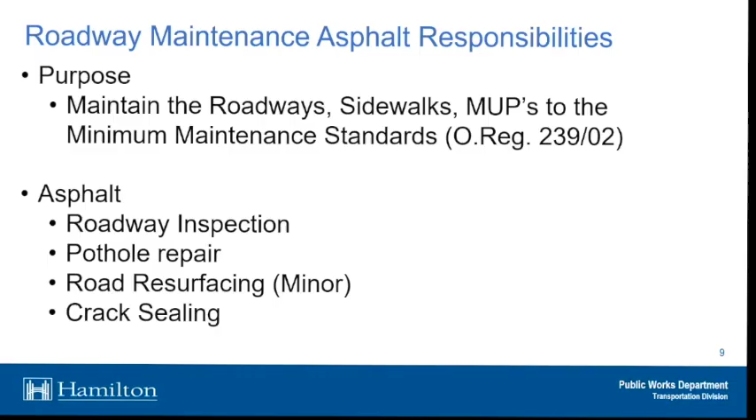Specific to roadway patrol, let's talk about road classification. All roads across the city are broken into a class of highway as defined under O.Reg 239/02. The higher the speed, the higher the volume, the higher the class of the actual roadway. If you can imagine a class 1 roadway - there's none in Ancaster, but the Linc and the Red Hill Valley Parkway would be a class 1 road.

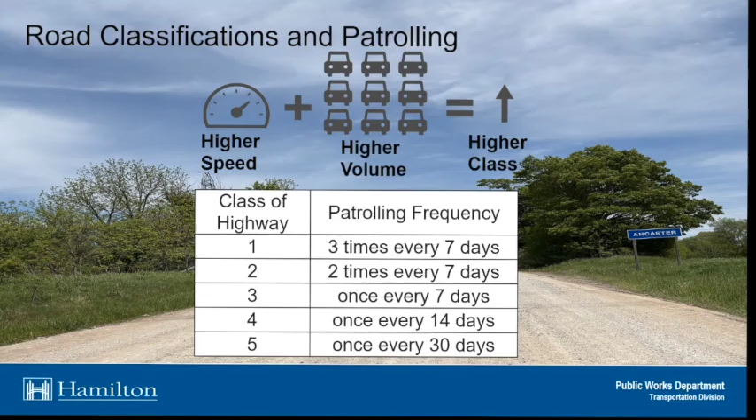So those types of roads we do patrol with our internal staff three times, once a week. A Class 5 roadway, which might be more of a residential road like Amberly for instance, we patrol once every 30 days with our staff.

Now specific to potholes, they're defined under the actual regulations, provincial standards that establish minimum maintenance requirements for roads. The city uses these to prioritize repairs across the entire city. So back to the class of road, under the regulation each pothole across the city has a defined criteria for the area and the depth. So if you find a pothole on the Linc for instance, we would have 4 days to repair it once we become made aware of that deficiency.

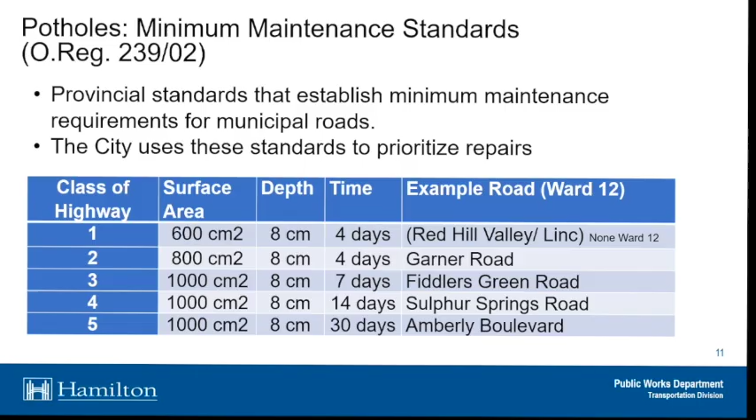A lot of the times we are proactive with our group out there patrolling the roads, and we will pin these deficiencies before they ever get called into the city, and we'll repair them within 4 days. Likewise, for a Class 5 roadway, we would technically have up to 30 days to repair them. However, anything defined at this size or greater, typically we're there the same day or the next day at the latest, usually.

Just a little graphic here about how potholes are actually formed, it'll tie into the next few slides. So water actually seeps through small cracks in the roadway. Once it gets under there, typically only over the winter months, it'll freeze. When it freezes it expands, then it'll melt. That cyclical process happens over and over, and eventually a void is left under the actual pavement. After that, traffic will go over top of that, and again that cyclical process will create a pothole.

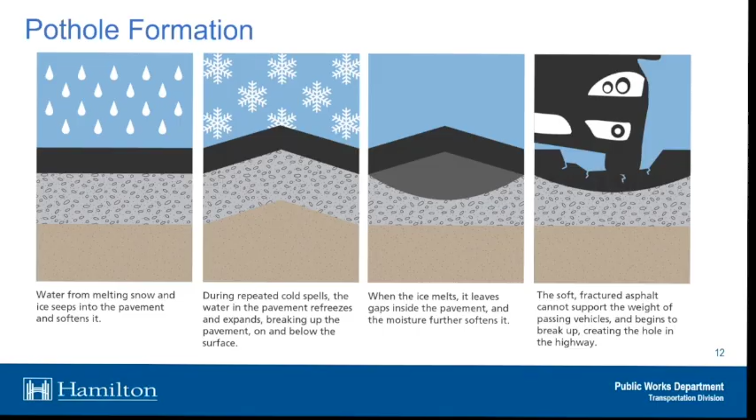So how do we find potholes, and how is our pothole repair completed across the city? Like I mentioned, we do have road patrol, we've got 6 staff that are driving across the city consistently throughout the entire year, and they'll identify any potholes we do find and flag them, and we'll go out and repair them. Additionally, we do have staff in other departments, our group, that do find them, again pin them, flag them, and we'll go out and repair. As well as councillor's office, maybe if anybody's called the councillor's office and submitted them, we do hear from the councillor's office, and we do prioritize and repair those as required.

And one of the biggest things we do rely on is the customer call center, or Ask The City. I've got a link to that at the end, where residents do call in and report it. We do create a service request for all of those, put it in the queue, and prioritize repairs and try to get them done as fast as we can. And then we've got 2 types of repairs we do complete across the city.

We've got temporary and permanent. Temporary is more aligned with anything around the winter time, when we got to fill a hole quickly before the next storm comes around, and it'll look more like the image on the right there. And then we've got a little bit more of a permanent repair, which is typically done outside the winter months. That's where we'll actually saw cut the asphalt, put a full depth repair back in place, tamp it, and move on to the next one. A good example of that would have been Russo Road, we just did 2 of those patches there leading onto the Linc.

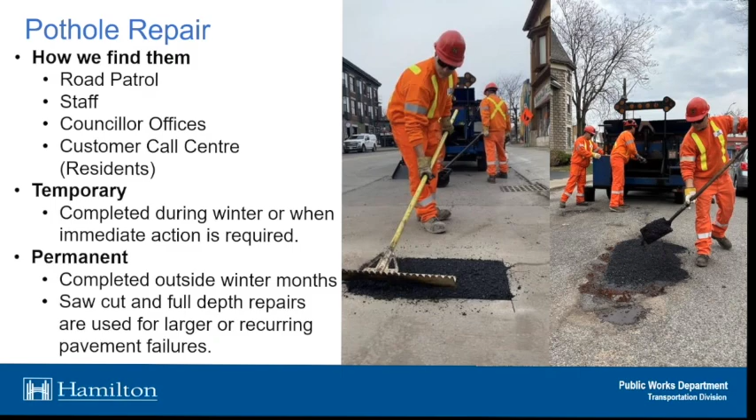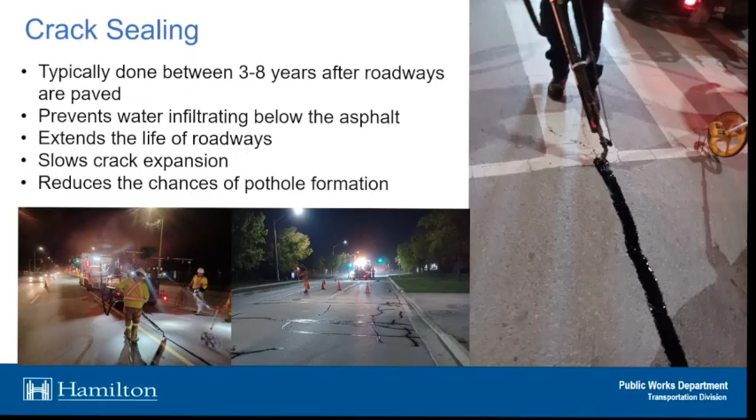Crack sealing, tying back to that image I just showed. This is a process we typically do in October of every year. It's typically done on roadways about 3 to 8 years old, depending on whether it's a full depth replacement or just a mill and pave. The purpose is sealing the road so water can't enter, which extends the life of the roadway, prevents potholes from forming, and slows crack expansion.

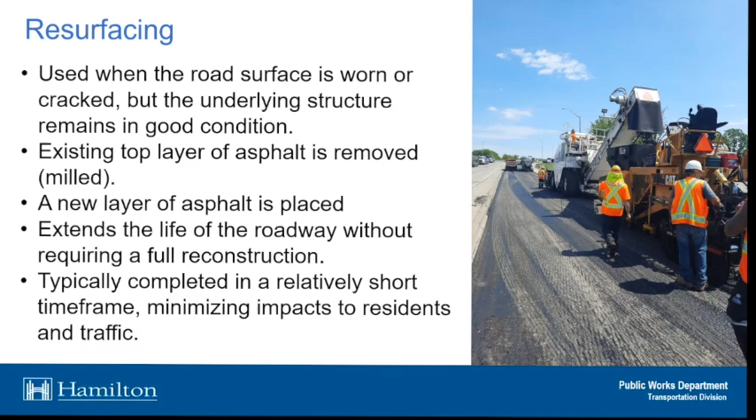Resurfacing is the one we wish we could do a lot more of. This is just mill and pave, and this is us on the Linc. Our group does that every single year, where we shut down the Linc and pave it over the weekend. So when a roadway surface is worn or cracked, in conjunction with engineering services we have a list of roads where we remove the top layer of asphalt and put a new layer on top, addressing potholes, deficiencies, or cracks across the city. It really does extend the life of the road with minimal impacts to most residents.

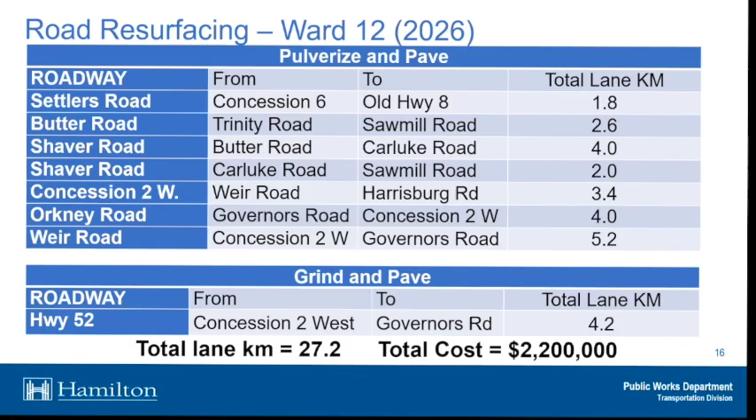Specific to Ward 12, our group is doing these roads for resurfacing this year. We're putting just over $2 million into Ward 12, doing approximately 27 kilometers of roadway across the city. I'll leave this up for a bit. This is basically the last slide, but it's the mill and pave process we're doing this year in roadway maintenance. I can always come back to that later, but again, this is roadway maintenance.

If you do see a pothole or a deficiency, Ask City or pothole at hamilton.ca are fantastic resources. We do truly appreciate anybody that calls those in. We prioritize and we take care of them and address those potholes. Happy to answer any questions after, but I'll throw it to my colleague Dipankar in engineering.

Good evening, everybody. My name is Dipankar Sharma. I am the Acting Director for Engineering Services. We're going to take you through how we think about roads, how we inspect roads, how we plan roads, and how much we invest in roads. With me is my colleague, Greg Boozman, who is the Senior Project Manager with roads.

Here's the plan for tonight. First, we'll give you an overview of the road network and show you a ward map for Ward 12, talking about all the roads there — you'll probably see your road on the map. Second is road maintenance. Peter Sinolis touched on that in depth. We're going to look at when we inspect roads, how we decide between maintenance work versus capital work, which is more about reconstruction and spending a larger dollar value. Third is where the money is spent and how. How much money does the city actually spend on roads, and what is our backlog? We'll have a discussion around that.

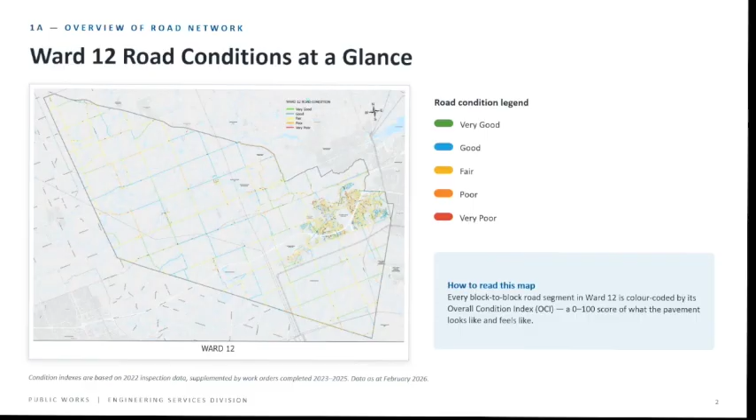Jumping on to our next slide, this is a zoomed in version of it. We're looking right now at the Ancaster urban core. We're going to leave this slide for a second. If you find your street, please go ahead.

Notice that there's a lot more yellow and orange here than the rural map that we had. That means the condition is between fair and poor, and there's a bit of red here too.

One of the things to know in Ancaster specifically, which is very local to this area, is when Ancaster was being built, the way subdivisions were planned, a lot of subdivisions were built together. They were built in waves and built together.

So when they age, they also age together. Once the subdivisions are aging, the roads are aging too, so you will have pockets of subdivisions and pockets of roads that need to be coordinated, and that helps us put all the work together. There's some good news here where we can recognize patterns and put all the roads in one neighborhood together having similar type of work.

We're going to talk about what different types of applications we do later in the slides. What that means is it helps us in getting better prices. So you have one contractor looking at a bigger section of the road, and hence the mobilization cost is lower, and we get better price per street.

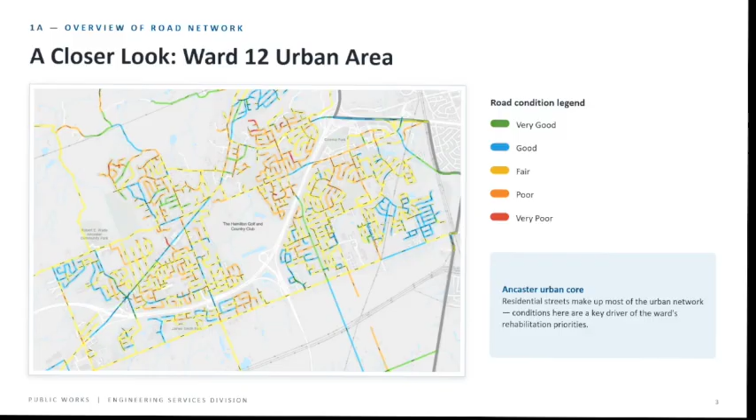So if you see your street and it's in orange, I know it's super frustrating. You see all the potholes that you travel through. Hold that thought in your head. When we go through the rest of the presentation, we're going to take you through this journey and show you why these roads are orange and why they're red, and how we're going to plan to improve them.

So before we get into the minutiae of things, let's talk about the scale of Hamilton roads. We measure roads per lane kilometers. So what that means is 1 kilometer of lane for a 2-lane road means 2 lane kilometers, right?

So if you have a kilometer of 4 lanes, that means we're going to talk about 4 lane kilometers, right? So we're all on the same page. City of Hamilton currently has 6,500 lane kilometers. To put that in perspective, it's a fair way to measure: if you were to travel in a single lane kilometer from here to Vancouver and back, and then go back to Vancouver and halfway back to your home, that's how many lane kilometers of roadway we have in Hamilton.

The reason is Hamilton is an older city and it has a lot of new parts coming up. So Ward 12 shares near about 984 kilometers of this network. It's about 15% of the entire city. Now, what really shapes Ward 12 is 61% of Ward 12 is rural.

What that means is when you talk about rural roads, there's fewer cars, often heavier traffic. You will see a lot more trucks, a lot more farm equipment. You will also see heavy traffic sometimes. There's not a lot of curbs on these roads, and there's no storm sewer. So these roads are slightly easier to maintain, slightly easier to work on.

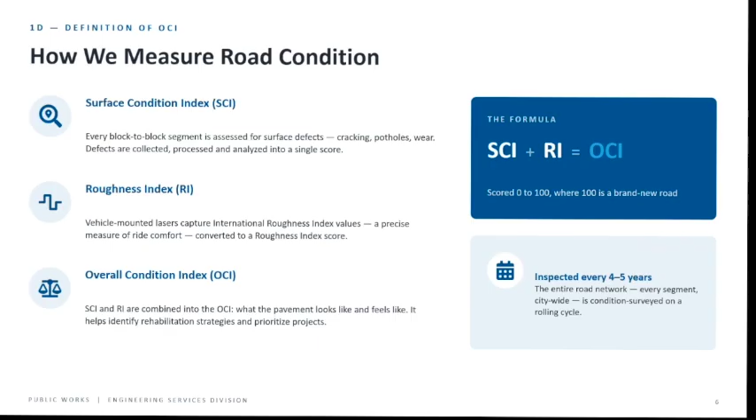So this is where we look at how these scores measure against the map. If you go to the City of Hamilton's website, there's a map that shows what color the roads are in. So starting from the top, any road which was recently done will have a very good OCI, which is 86 to 100. And what that means is that we're not leaving that road to decline - we're going to do some preventative maintenance on it.

So Peter talked about crack sealing and pothole repairs. If you see any cracks, it's very similar to what we do on our driveways - if we have asphalt driveways, or if we have concrete, we go seal it. So that would be part one. The second is when a road is in that condition of 71 to 85, which is preventative maintenance - again, a very similar strategy that we apply. The cracks do get bigger, so we're still looking at crack sealing.

Then we get into a road that has slightly poor condition, which is from 56 OCI to 70. So going back to the definition of OCI, overall condition index, this is where you will see an overlay done, a shave and pave, or in more practical terms, what we call operational resurfacing.

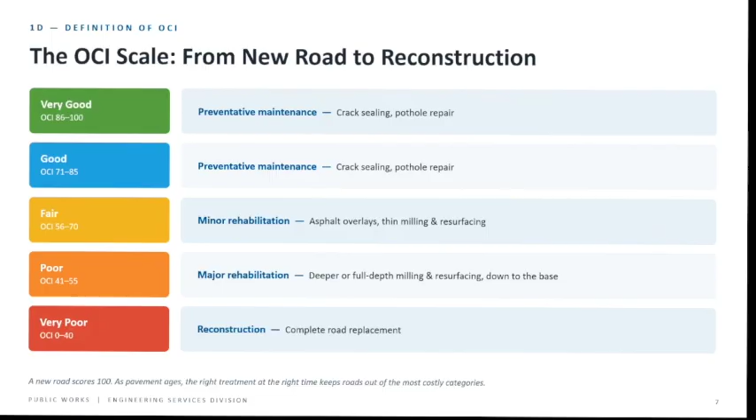So this is where most of the coordination happens. When we are looking at reconstruction of a road, we're looking at ripping everything below it. So we're going to change the sewer, we're looking at storm, water main replacement, the whole nine yards. Coming out of those OCIs, these are a few of the strategies that we apply.

So the first picture you see here is called operational resurfacing, very similar to shave and pave. This is where we would mill the road down. If we can catch an asset, such as a road, in that particular window of OCI, it's the best value spent.

Then comes road rehab, where you will have more safety enhancements to the road, where you will see raised cycling paths and sidewalks extended. And the last is road reconstruction, where you see a big pipe that is a water main that's about to go in.

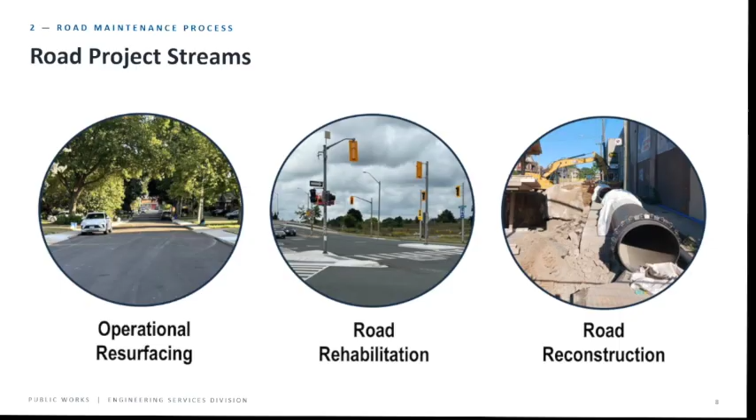So three different project streams, very different applications depending upon the road, and very different timelines as well.

So I'm going to hand this over to Greg, who's going to talk about the deficit that we have in Hamilton. Greg. Good evening, my name is Greg Wisman, and I'm a senior project manager in the Public Works Department.

And my team works with roads all day. So it's great to see some enthusiasm and see residents who are also interested in roads. Thanks for coming out.

I'm going to talk a little bit about the infrastructure deficit, spend a few moments on that.

So following World War II, there was a baby boom here in Canada. And while people were out busy making babies, tremendous amounts of money were also invested in the country to upgrade roads, to build new roads, highways, subdivisions, buildings, bridges. And it was a time of tremendous growth and lots of money was invested.

And this went on for quite a few years. It went on through the 50s, the 60s, the 70s, and tremendous amounts of money were spent on building all of this infrastructure. Unfortunately, there was no money set aside for maintaining all of these assets. So they were all built, but very little money was spent on maintaining them.

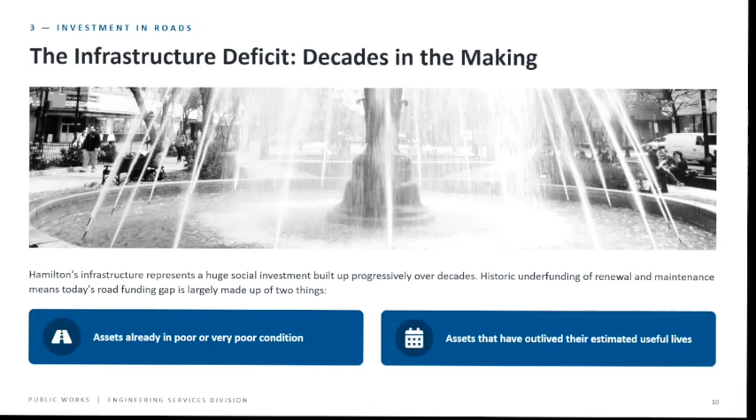So I want to talk a little bit about how at the City of Hamilton we fund roads. We have two main funding sources: our tax-supported capital budget, and a rates budget. The tax-supported capital budget comes from property taxes, and it also comes from federal gas taxes, and a little bit of development charges.

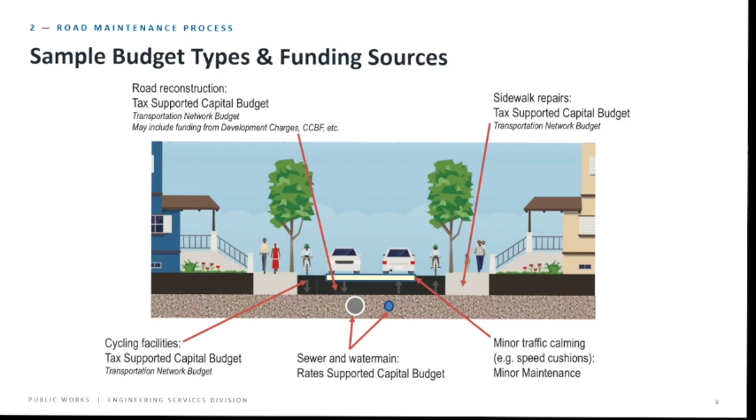And that money is used for building the actual road, the actual asphalt, the granular base, the curbs, the sidewalks. And the subsurface infrastructure, such as sewers and water, that is paid for through the rates budget at the City of Hamilton. And the rates budget is derived of revenues from your water and sewer bill. So these two funding sources are used to build our roads here in the city.

So if we were to take all of the linear road assets in the City of Hamilton and have to rebuild them today, they have a value of about $5.9 billion. It's quite a large number. Of that, about 4.6 or 4.7 billion is the actual pavement portion of the roads.

Unfortunately, we are not spending anywhere near 110 million. We're spending roughly a third of that, about 34% toward what we should be spending. To put that in perspective, for every dollar we should be spending to renew and rejuvenate our roads, we're only spending about 34 cents. What's happened? We've formed this huge gap in spending. But that's the bad news.

The good news is we are working on resolving this issue. We are increasing spending gradually. In 2020, we only spent 59 million on our transportation network. Last year, we spent 88 million, so there's been a tremendous increase. Now, I just want to point out that's the entire transportation network, including roads, bridges, all of our transportation assets.

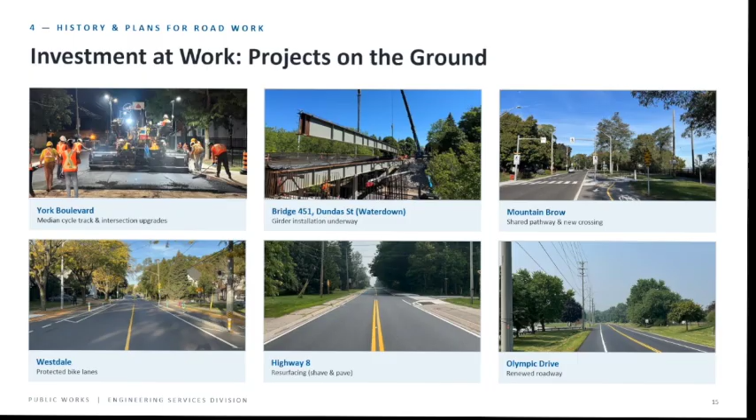And that's the end of my presentation, and we're open for questions from myself or any one of these other gentlemen.